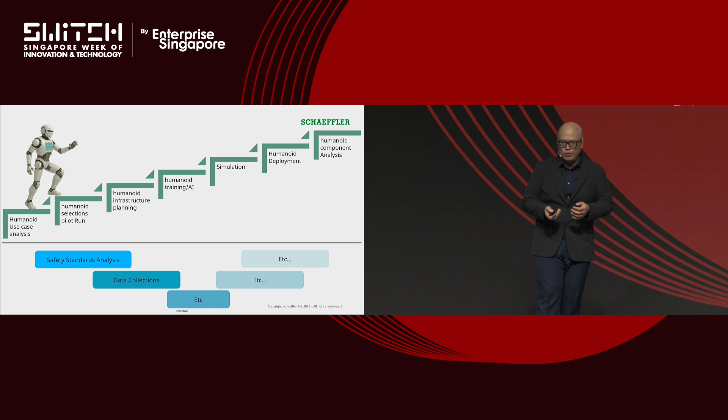So this is the time right now. A lot of people are saying it's still far away, but we should look at these activities right now to prepare for the next 10 years, because if your humanoid are selling about 20,000 USD, I think we are quite able to afford to buy the humanoids for our day-to-day usage.

So this is also an analysis, maybe just an example of how we analyze our use case. We basically correlate the value stream activities, the tasks, with the skill sets, as you can see. For us right now, we focus very much on logistics. We find that it's one of the easier tasks for humanoid, a very repetitive, mundane type of job. We are interested to deploy humanoid for logistics.

But as you can see, when it comes to the most complex tasks, which is the process and the assemblies, this is where the humanoids need to have reasoning, because there's many parts and components. They need very complex dual arm manipulations. For us, it's always easy to open and close a bottle, but this is one of the most extremely difficult tasks for the humanoid. So we proceed with logistics and material handling first, and that's where we understand about the humanoids. Concurrently, we are looking at research on how to do the assemblies. We need to understand how the robots can learn, how the robots can correct themselves when they assemble something wrongly.

These are basically the types of analysis we are doing right now. Maybe an example, this is just material handling. As you can see, we have a production plant where we do this very repetitive, mundane job. What we have done right now, at least in the first pilot runs, is actually use the humanoid to perform this type of materials handling. So this is something we are testing right now. We are understanding what are the technology barriers needed. That's where we collect the data and then improve until the robots are robust enough to really perform a real task.

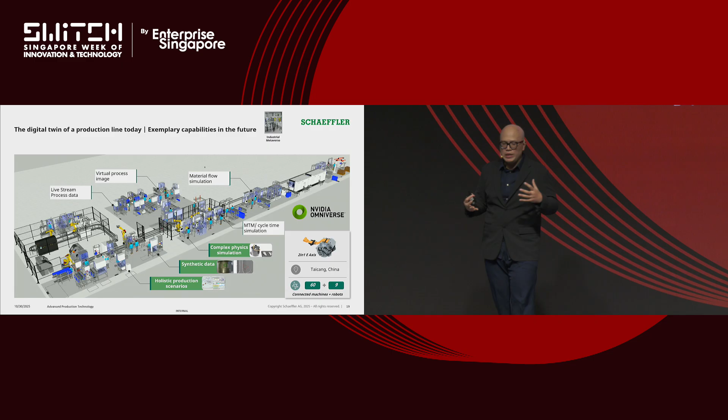The third thing is that we want to create an omniverse using part of the NVIDIA solutions. We want to create synthetic data for training, and once we're able to train, regardless of the machines or robots, that's where we know how it behaves, and then we look into deployment.

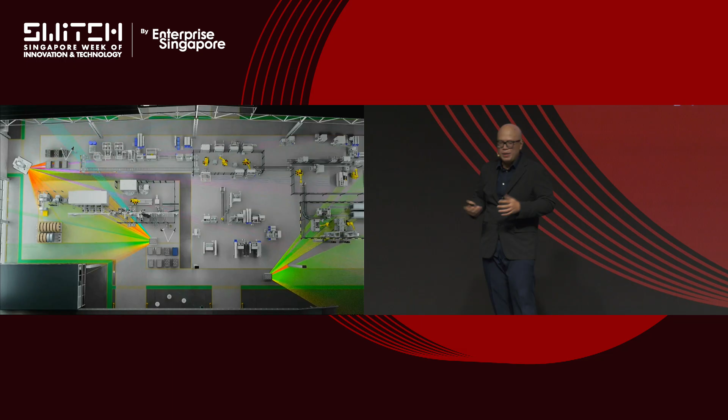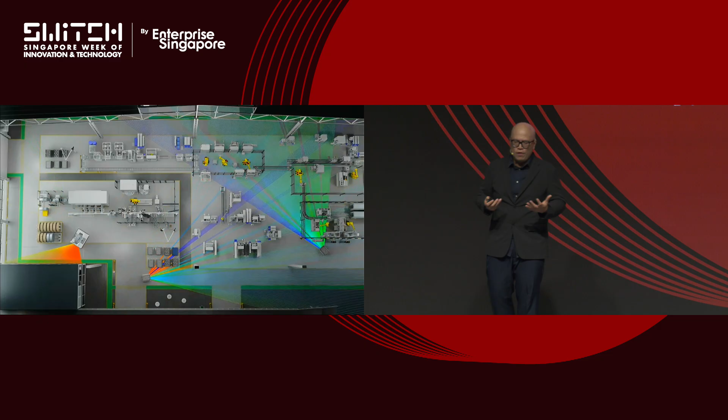Maybe this is just an example. How do we actually use Omniverse? That means with our production plant, how do we connect the machines and robots together, how do we analyze the sensors? Let's say the robot is detecting something - this is the type of activity we are doing in terms of analyzing and understanding the technologies.

Another thing is, once we are able to create a very robust simulation, of course we are interested in this Omniverse solution because we are able to simulate the physical model.

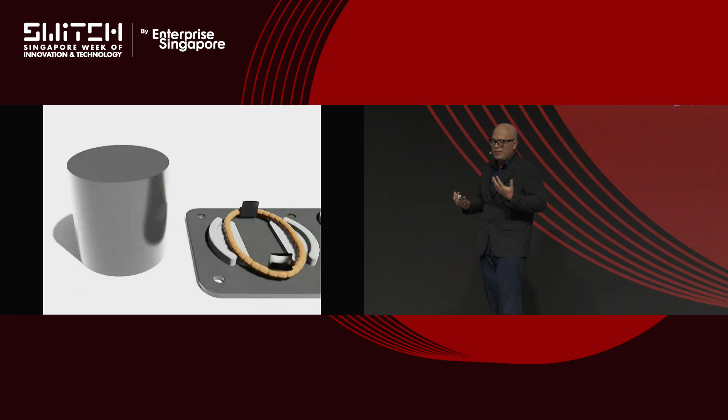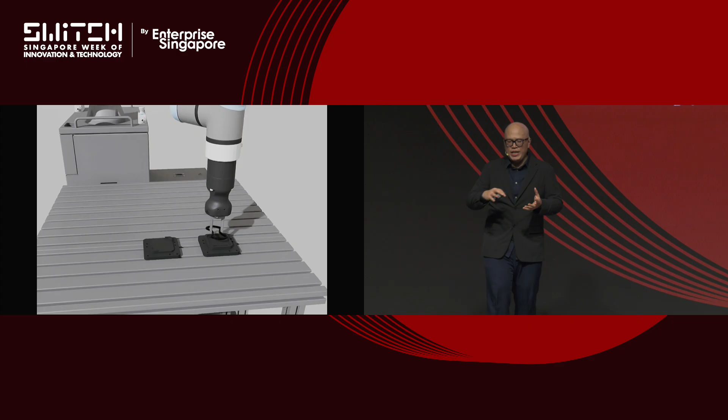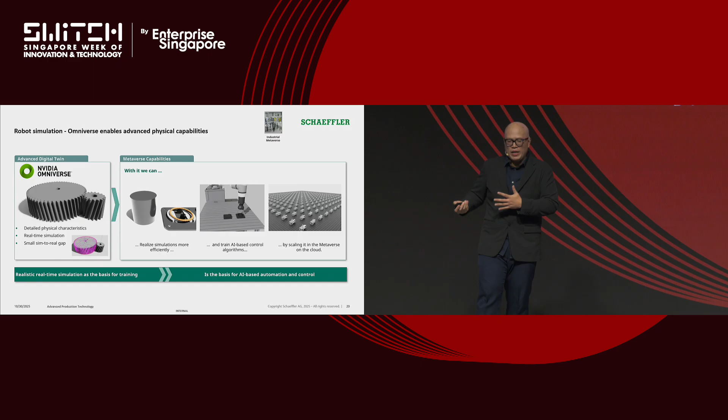This is one of the interesting things - we basically train, in simulation, how to put a rubber on a tube, and we start to really learn that it helps. After 1 hour of training, after 18 hours of training, you see the intelligence of the robots improve. Previously it took a lot of time, maybe more than 500 hours of human training of robots, but nowadays with synthetic data training and just a short hour of training, the robots are able to learn very fast.

So this is basically the steps that we do: looking at the pilot use case, analyzing, looking at the safety, and then in the end looking at training of the robots. This is basically a step-by-step approach that we do.

So we also look at advanced innovations in Singapore. This is where we actually have collaborations in NTU back in 2017, and this year we have a phase 3 collaboration really looking into advanced AI and robotics.

So maybe just to give you a flavor inside the lab, we are really looking at fundamental research and development, all the way from components to system understanding, and really want to look at what are the unique technologies we can use to enhance our humanoid business, or even in terms of applications. These are the types of things we are doing.

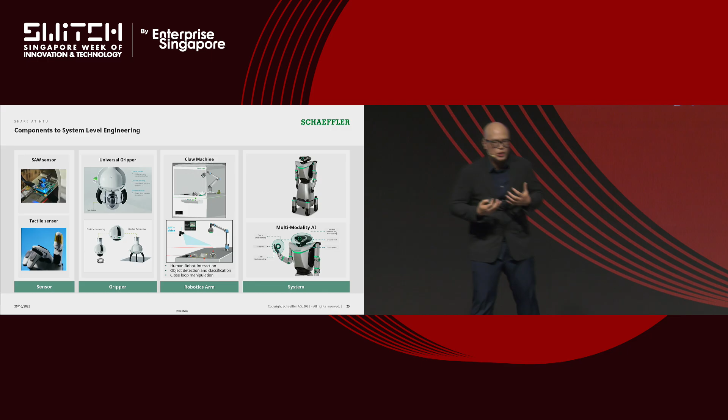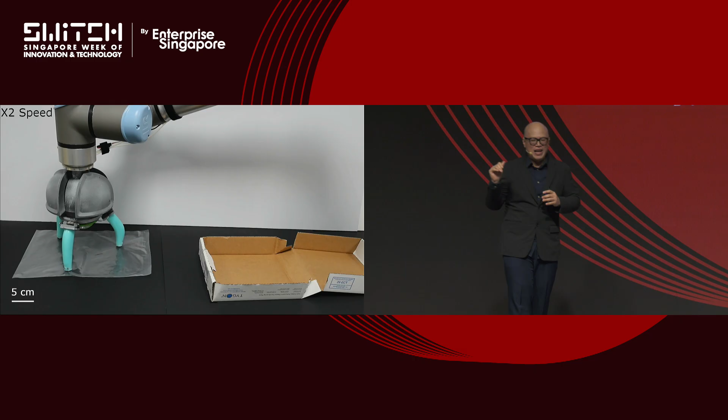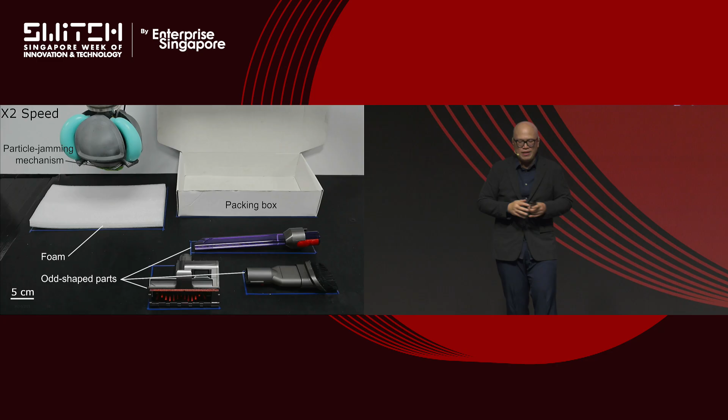Maybe just an example - we have a very painful use case, I don't know if I'm able to play the video. Let me try. One thing we find is that when applying robotics or humanoid, the biggest pain point is the gripper, not manipulation. Humans are very flexible when it comes to gripping, but what we actually do is want to develop universal grippers that are able to pick up soft materials like plastic. We also want the same grippers to be able to pick up more complex stuff like styrofoam or things like vacuum cleaners, all in one, at a very low cost.

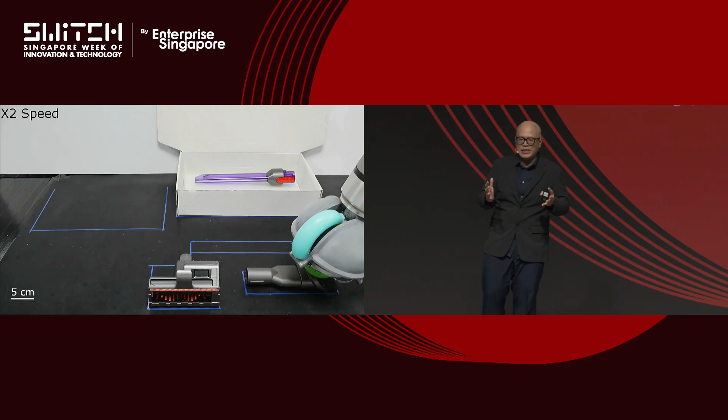This is research where we use gecko skin, meaning lizard skin, that's able to pick up plastic, but we are also using coffee powder. If you can see, the green color is coffee powder where you create particle jamming, able to grip soft and hard materials. So very organic, animal-inspired type of grippers, and it's low cost. This is basically the type of research and development we do in NTU.

So what's next? Another beauty about grippers, or humans, is that we can see with our hand. What I mean is that without actually looking at components, you are able to differentiate whether this is an orange or an apple. This is because behind it we have a huge data set, or the large language model that we have.

So by using generative AI, we say please try to assemble your components from the hardest to the softest. This means we want to create the intelligence of your grippers so they are able to perform tasks with lower computational power. This is how humans do it, because we are able to do things very fast, at real time we see things with our hands and coordinate with our brains to perform certain decisions.

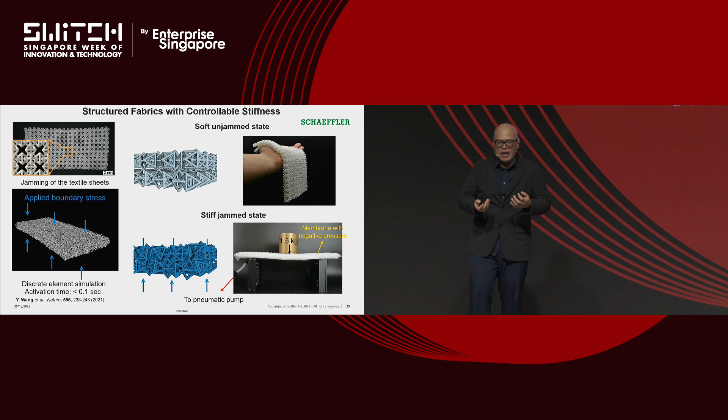And some of the others, we are looking a bit more like a skin. This is an example, by creating different types of particle jamming pressures, we are able to create so-called soft robotics or soft skin.

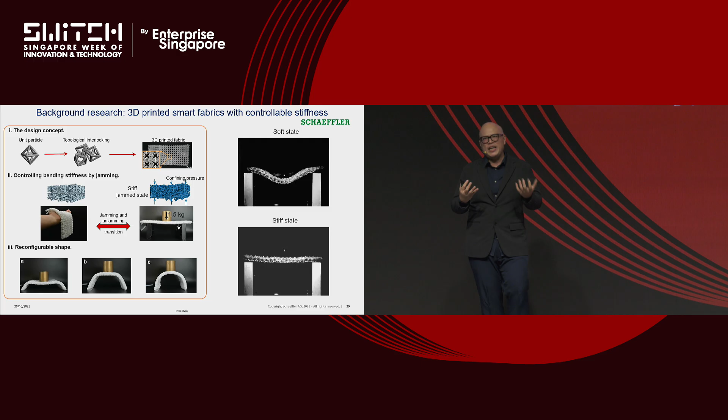Here's an example - at the soft state, the soft robots are really very soft. But if you just change the physical topology, this is where it becomes hard. This is also in terms of safety - we want to create technologies where the robots can be soft and hard at the same time. So we discovered this is basically the need for safety.

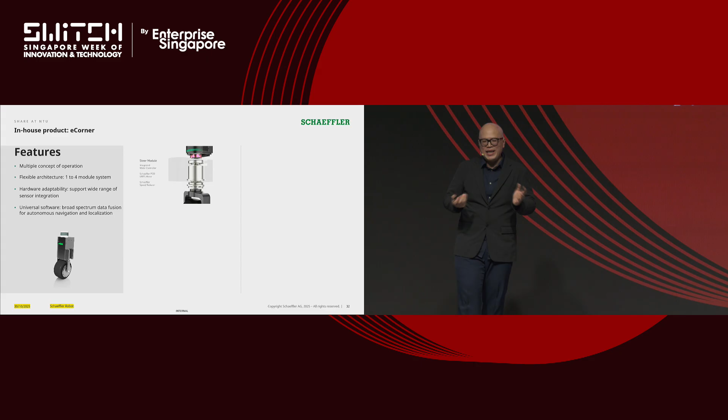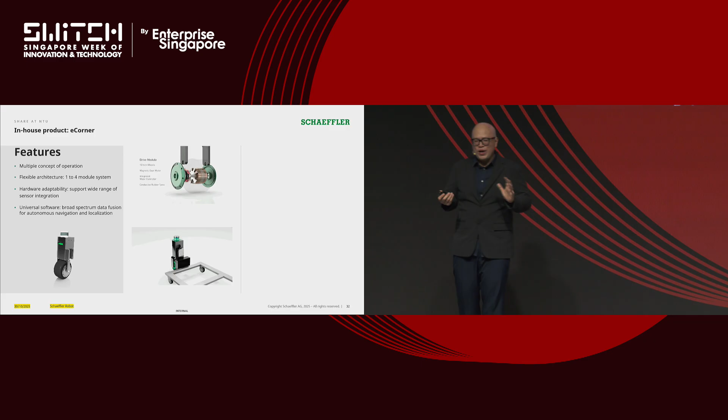These are all very interesting technologies, and we're also looking at mobility as well. One example right now is there's a lot of solutions so we want it to be very reconfigurable and very modular. This is not only for humanoids, but in our factories right now we are also looking at how you convert a mechanical trolley solution into a fully autonomous one.

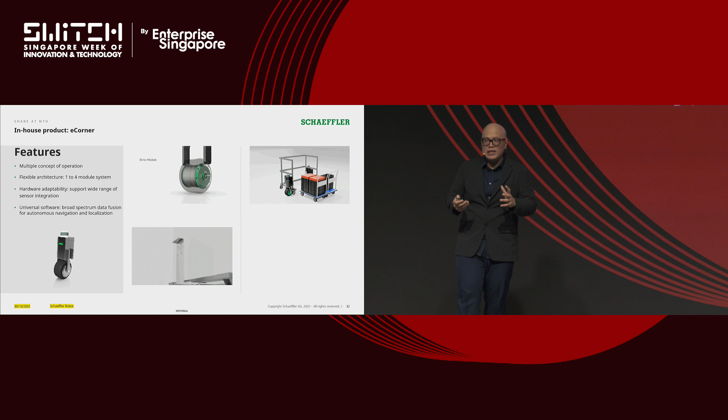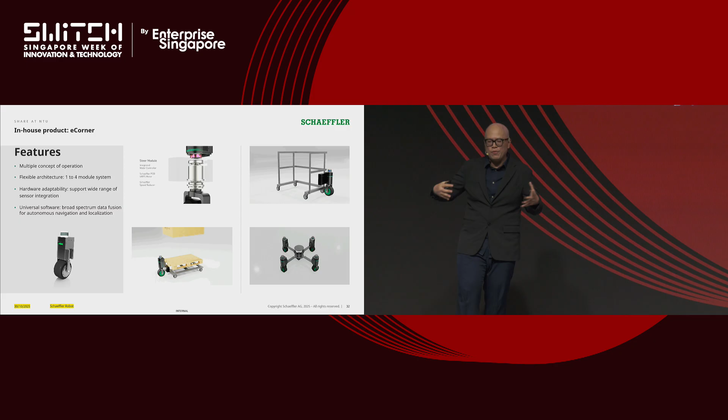So we have invested a lot in these so-called trolleys. This is a very reconfigurable type of solution where we are able to attach these solutions into mechanical trolleys and it's able to move around. Or even in the last one, it can reconfigure itself, like a snake robot, where it's able to understand the whole situation. This is where they are able to reconfigure to navigate itself in a very safe way.

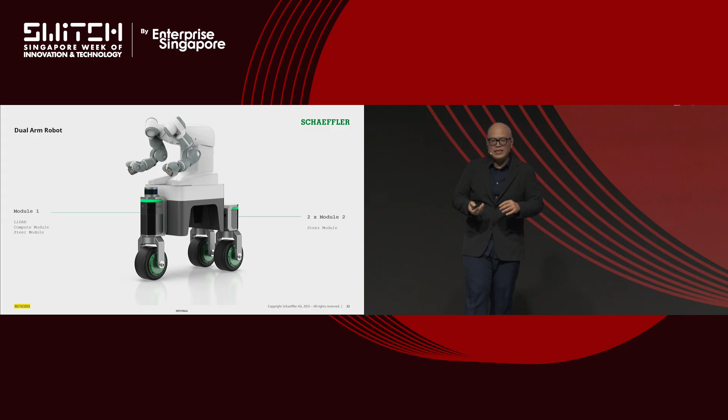So the idea was when we have this type of mobility, this is where we are able to integrate it into our robots, where it's able to move around very safely and nicely around the factories to perform tasks.

So this is my last slide. The current situation for us is that we are really looking at pilot use cases. We are also looking at dual arm. And in the next few years, we would like to deploy more humanoids to basically understand. Concurrently, we are building up our innovations so we are able to strengthen our product and also strengthen our applications.

So with this, I hope that you all can enjoy my presentation, and feel free to ask me any questions if there's any. All right.